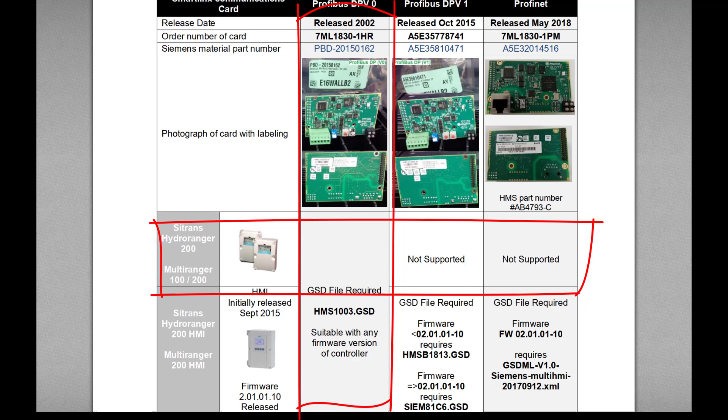this is a tech note we've done at Siemens, and you can see here the old HydroRanger with what we used to call the P parameters, and this had a DPV0 card. It was released 2002. It's still available now. If you want to put that into this unit, you can still purchase it. And it's very difficult to see the difference between the two cards, because what we have here is the DPV0 card and the DPV1 card.

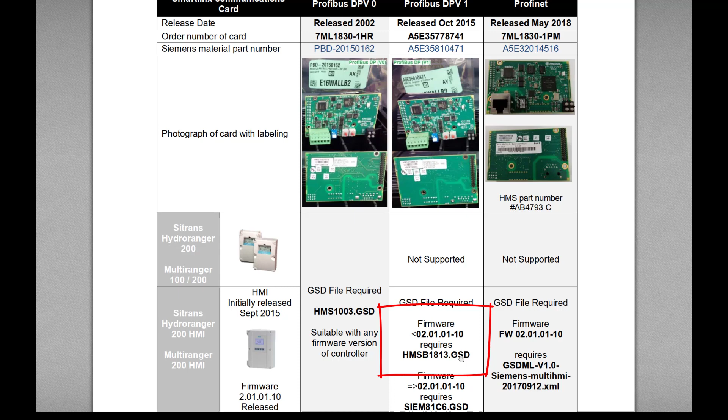They are different part numbers, and when the DPV1 card was first released, we used like a default GSD. Siemens just wanted to get it to the market, and that's fine. But this GSD, even though it's still DPV1, we couldn't get the full functionality with acyclic read writes and SIMATIC PDM connectivity. So we released a new firmware, I believe it was around May 2018, and the GSD memory map was changed,

and you can see here on the right hand side that the Profinet card more or less came out at the same time, and that card also supports Modbus TCP. So what the clever people at Siemens R&D have done is they've made the memory map the same for all versions. So the Modbus TCP, the Profinet and the Profibus DP card have the same memory map or slot index table, but you have to be careful.

So you need to check the firmware if you're using the DPV1 card on the HydroRanger 200. If your firmware is less than 2.01.01-10, then it's this GSD. If it's greater than that, then it's the new Siemens GSD. If you want to use that, you can quite easily upgrade the unit. Inside there's a USB port, and you can upgrade the firmware on the base unit and the display, and then you'll be able to use that GSD. But you need to check your firmware to see which one you're compatible with.

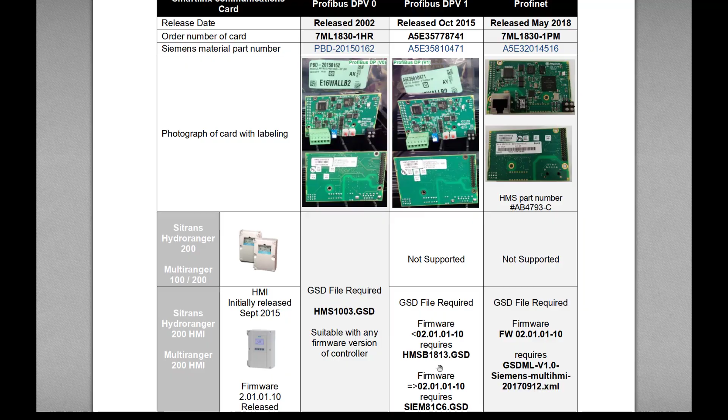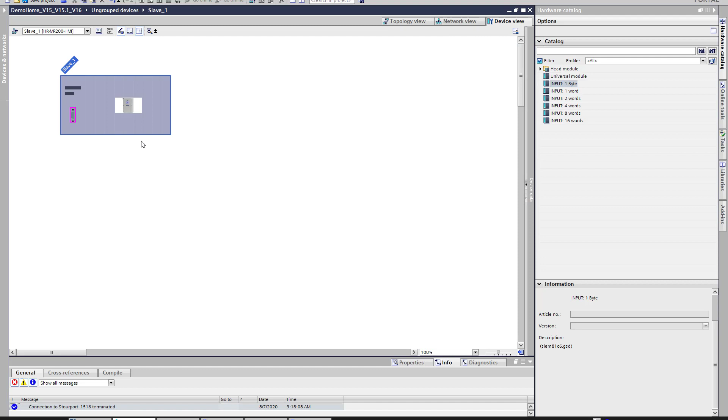So here we are back in TIA Portal. I don't have the instrument live, but I can show you the process. So the GSD we're using, you can see there, SIEM81C6 GSD. That's the one we're focusing on, which is the latest one. If we drag and drop that into our project and then double click it, sometimes the thing that people struggle with is this little arrow here. So you may have this view, and you're thinking, where's my slot index table? If you just click on the arrow here, you'll see your slot index table, and you can expand it.

Now the functionality is a little bit strange on here, because it's trying to make the memory map the same as Modbus, and Modbus doesn't use bytes, it only uses words. So you just need to be a little bit careful, but the slot index table is already populated for you when you put your GSD in. If it isn't, the likelihood is you're using the older GSD that you can edit quite freely. So if you delete this one, let's just have a look here. This is the input word for the process value.

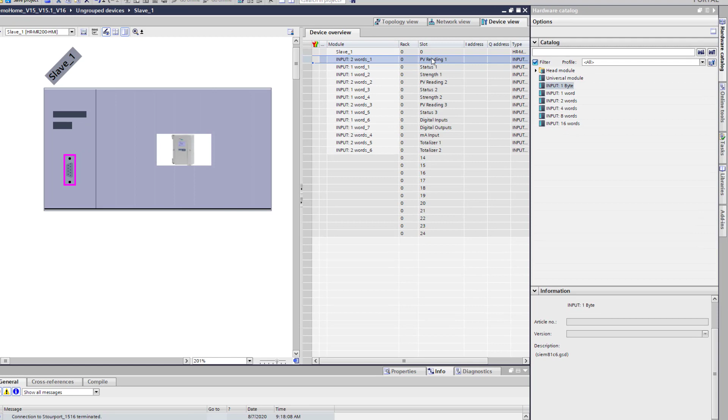If we delete that, it won't let me put something in there that's wrong. Okay, so I can only put in the correct value. Because it's a real, it's 2 words, and there we go. I'm used to it, so it's quite easy. But the one that is a little bit strange is the status. This is a status byte, but it's designed to work with Modbus, and as I said, Modbus doesn't support bytes, it supports words.

If I delete that and try and put a byte in there, it's not going to let me. It's going to want a word, and the status byte is the lower part of that word, because a byte is half a word. So you can't do what you can do on some devices where you can delete that and put a blanking module in there. So I would recommend leaving this slot index table, especially if you want to start doing acyclic read writes, because you reference each one of these slots when you do an acyclic read write.

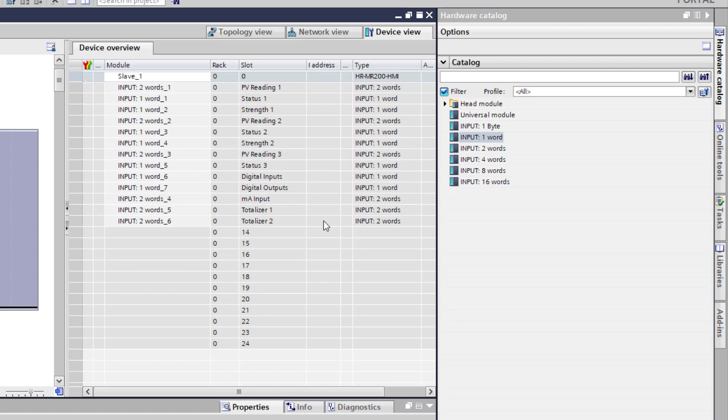So that's basically it. If you're using the up-to-date GSD, you don't have to do any editing on the slot index table. It's all there. This is a common mistake: you're looking for your input-output words, but for some reason they're not there. Well, it's because you've not linked that to a master. If we go back to the network view, you'll see it's not assigned to a master. The master's what has the memory location, so as soon as I assign that to my master, you can see the DP connection there.

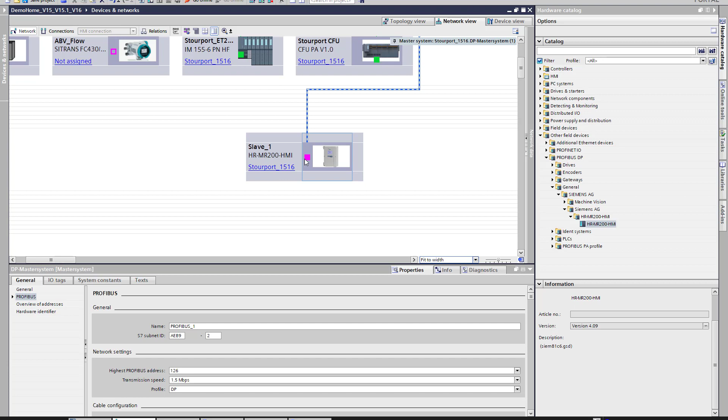I can then go on to here again, and now I will see my memory locations. So if I want to read this one back, it's PID 67, and that will give me my programmed process value. So if it's programmed for level, that's what it'll be. Flow, etc. This is a short video just to show you how this slot index table works. I hope you found it useful.